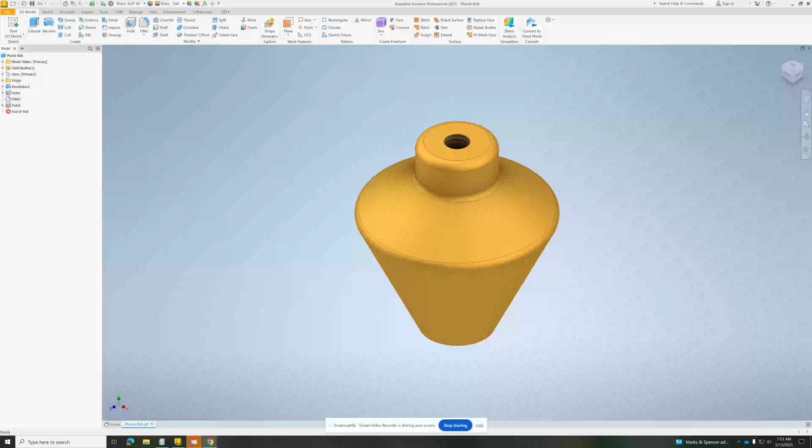Okay, in this video I'm going to go over how to do the Lathe CAM for this Plumb Bob. Some things to note: we have a tapped hole on each end, which means that we're going to need to flip the part in the lathe to tap the other side.

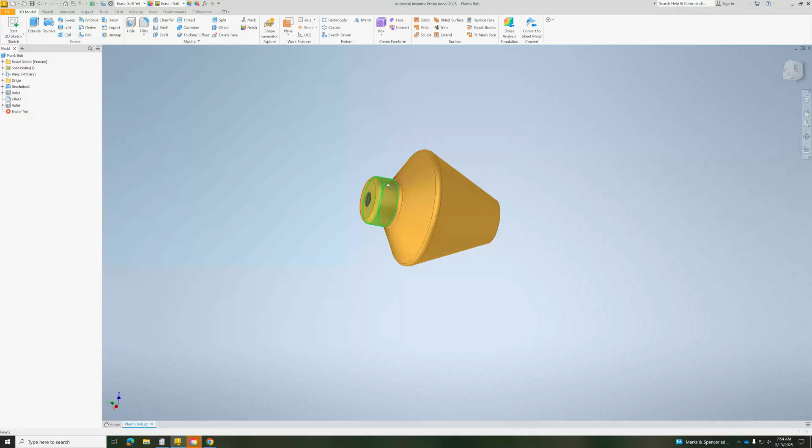Looking at this shape here, this is a cylindrical shape, so this could be held in the 3-jaw chuck on the second setup, and so it's recommended that we machine all of this first, do the cutoff, and then flip the part, hold this side, and then drill and tap on the opposite side.

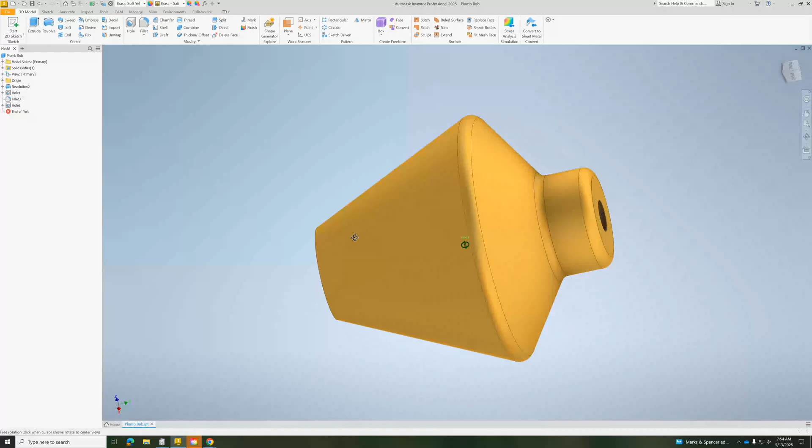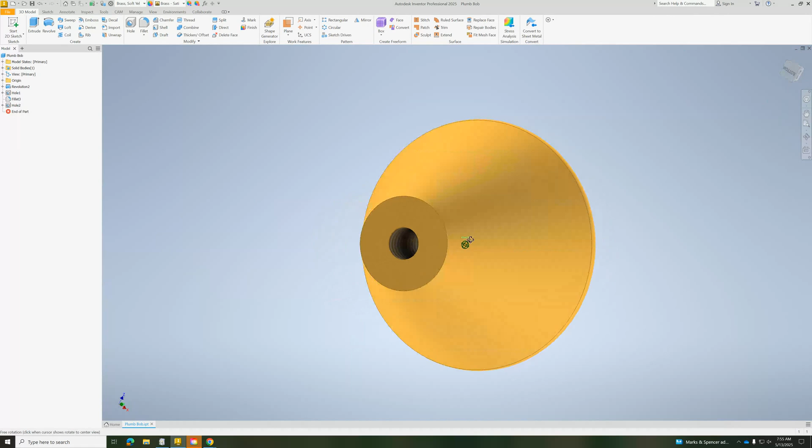One concern with flipping the part is ensuring that this hole is aligned or coaxial with this hole. And so one way to ensure that is when you do this drilling operation on the first setup, you could drill all the way through. One thing you need to make sure is that your drill bit is long enough to do that. I am going to demonstrate that

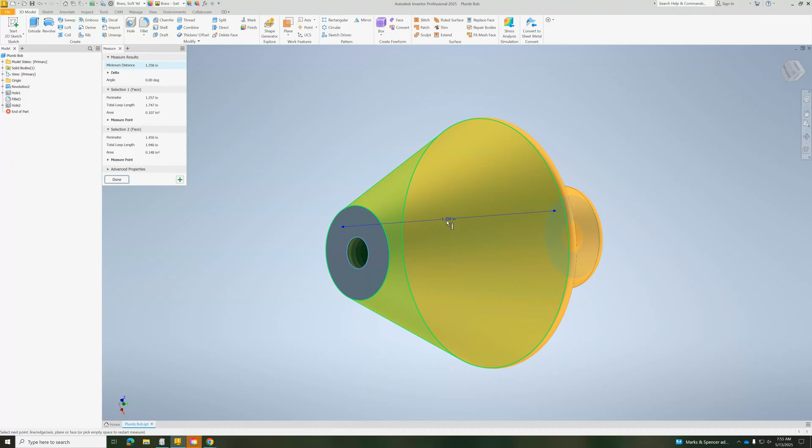when I do the setup, but then when going to the actual lathe, you would need to measure the length of the drill bit to make sure that it is sticking out longer than the length of the part plus the depth that you're cutting. So notice this is 1.358 inches. So if it's 1.6 inches or something like that, we should be fine. And if it's not, we would need to pull the drill bit out in the collet that it's held in so that it's long enough.

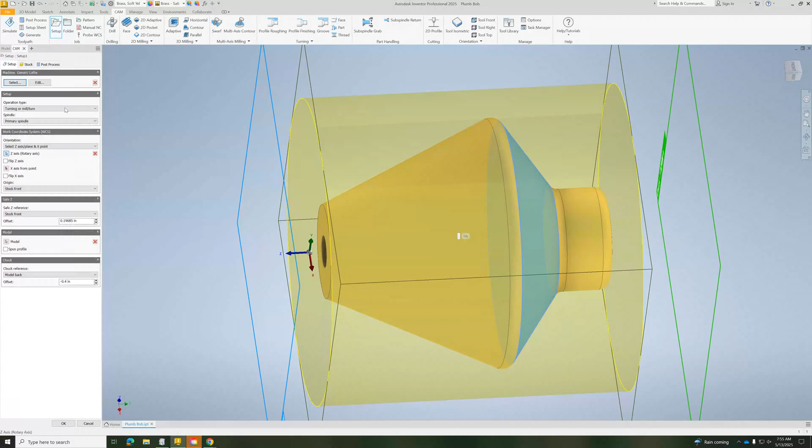So going through on the setup, we go to the cam tab, go to setup. First thing is we want to tell Inventor that we're using a lathe, and then what I'm going to do is flip the Z-axis and go to the stock. I am not sure of the stock size. Inventor chose 1.5 inch. That's a common size, so we'll just stick with that.

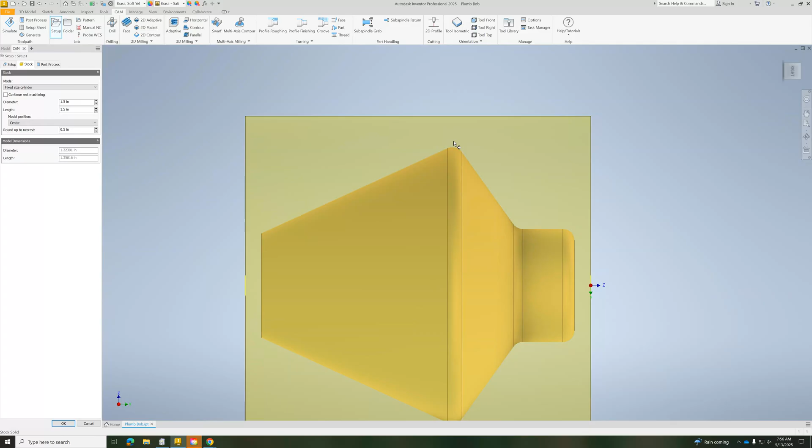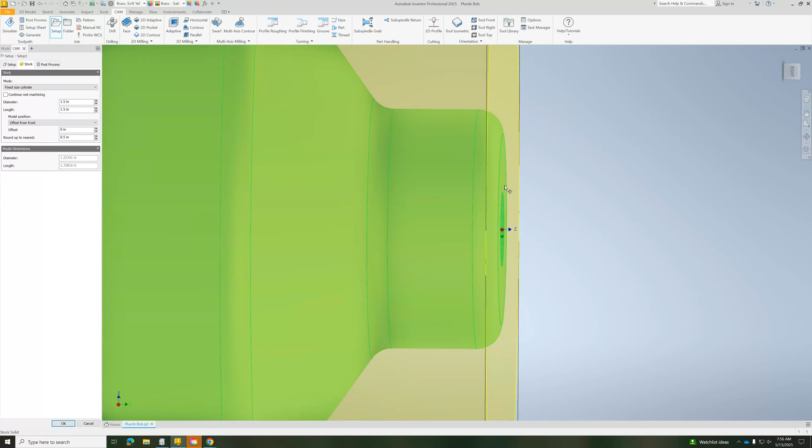We could probably find something a little bit smaller, but we don't always have the incremental size of stock that we would like. So there is a fair bit of waste because the stock is a little bit bigger than the diameter of the part. One thing I do want to do is go offset from the front so that the Z-axis or the XY plane is right at the surface of the part. Basically, we would face the part, set that as Z0, and then start the machining.

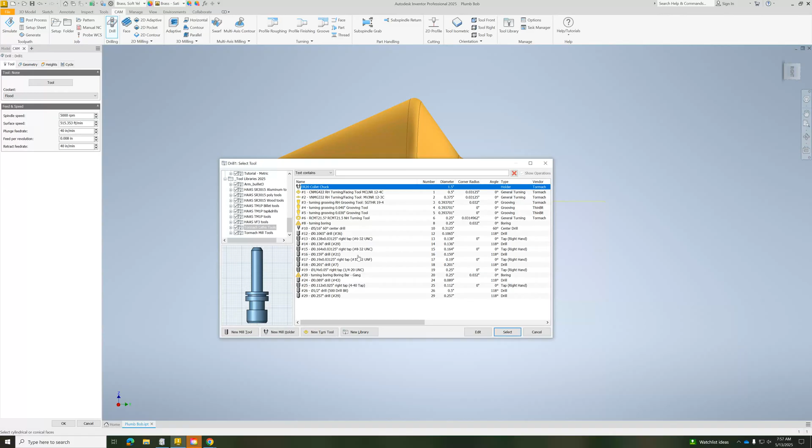So now that we have the setup done, I'm going to go to drill, select what I want to drill, go to the tool. On the lathe tools, this is a 10-32 hole, so we need a drill that will eventually be tapped at 10-32, which is this drill bit, 0.159. I'm going to go select.

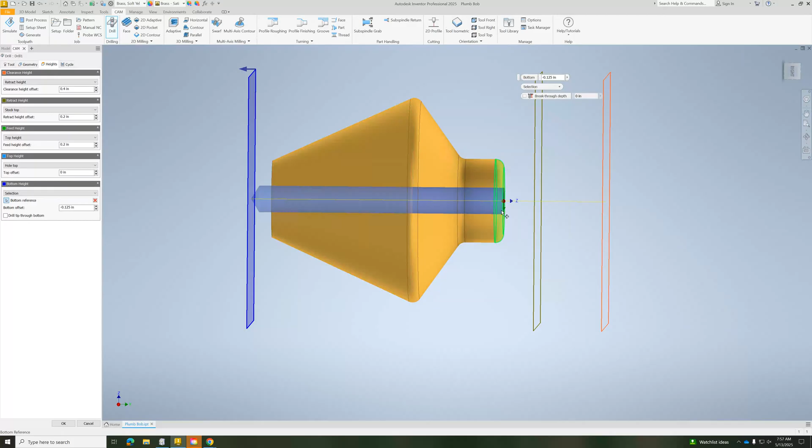Notice by default it sets the bottom depth at the bottom of the hole. What we're going to do is, instead of going to the hole bottom, I'm just going to go selection and select here, and then maybe we can go an additional 1/8 of an inch further to make sure that we've broken through. Notice that we need to make sure that the drill bit is that long to be able to get through that.

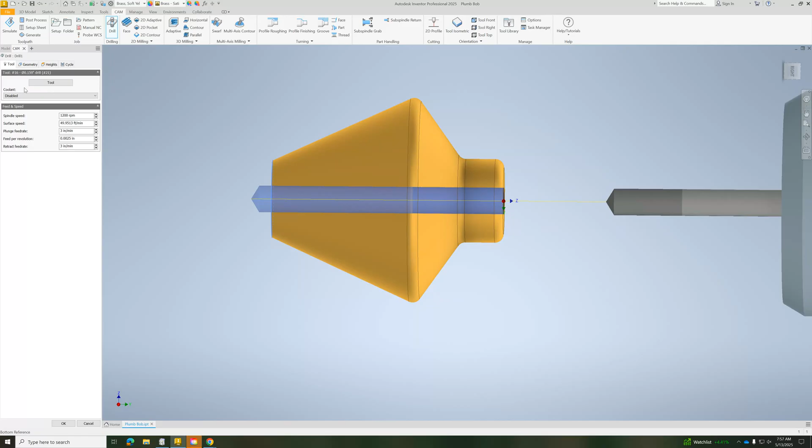Now, we want to not just do a standard drill. I recommend that we do a full retract deep drilling, and then it will go in almost 40 thousandths, and then clear the chips, go in again the additional 39 thousandths, and keep doing that until it's all the way through. We'll keep the default settings for the tool at 1200 RPM, and then hit OK.

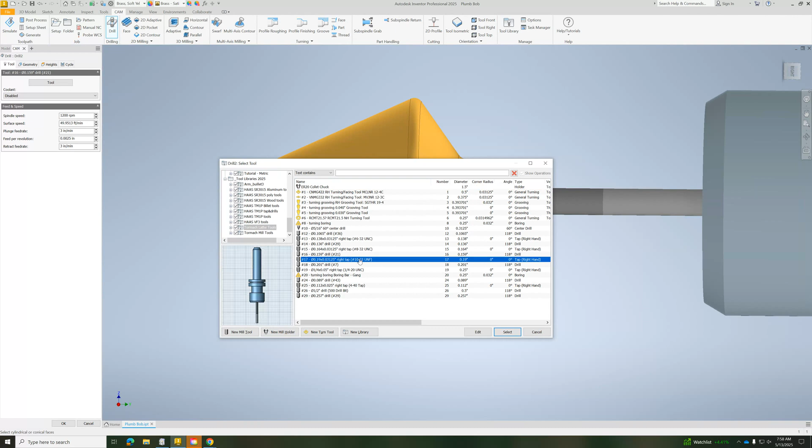Now that we have this drilled, we're going to go to drill again, but this time we're going to select the tap. So on the Tormach lathe tools, we'll select the tap, 10-32, which is here, the 10-32 tap. Select that.

The geometry is this. The height will just go to the bottom of the hole here. We're not tapping all the way through. And then the cycle, I recommend that we do tapping with chip breaking, and so it goes in, by the default is 47 thousandths, so it goes in 47 thousandths, comes out, goes in, comes out, until it's made it all the way through, or into the bottom of the hole.

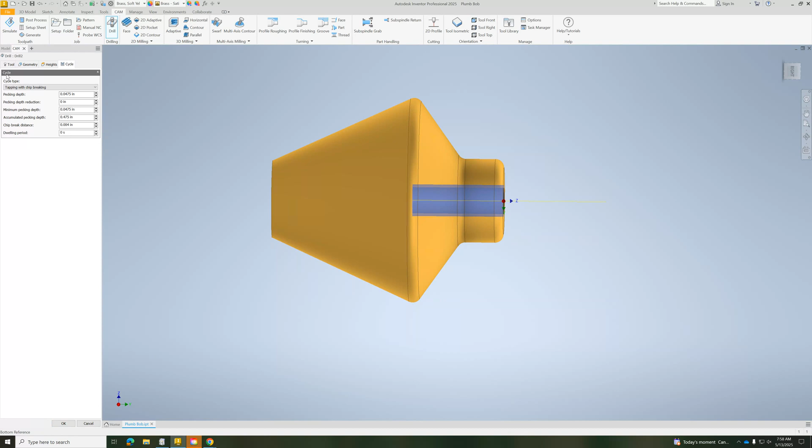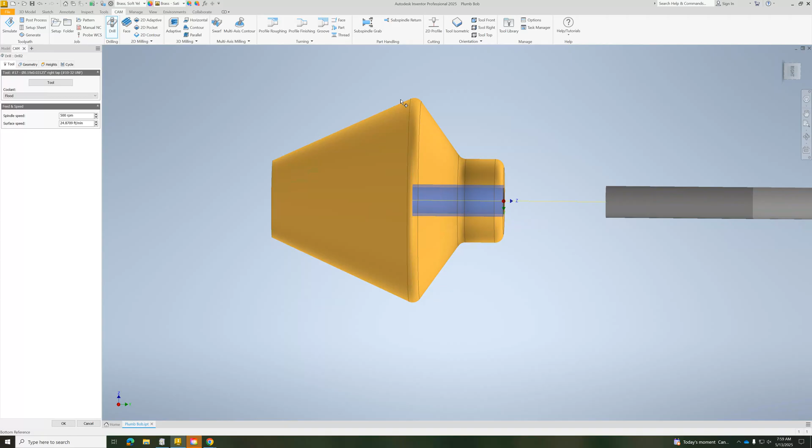When I set up the tools, I set up the speeds, and so the spindle speed is reasonable at 500 RPM. Realize that the machine has to reverse direction when the tap is coming out of the part. And so the Z speed, or the Z feed rate, must be clocked with the rotational speed to get that tap correct. So now that we're done with this, basically we're just doing the standard contour.

So I'm going to do profile roughing. Going to use, should be able to use tool 1 here, just the standard profiling tool. 1 or 2 would be fine. I'm going to select this tool. The speeds, definitely going to bring the speed down. And I am also going to change the depth of cut, maybe to 20 to 25 thousandths.

And I'm just going to go to the back of the part. Model back is, so it's going to go here. And there should be a little bit of stock to leave. And it looks like we're okay there. So I'm going to hit OK. See what that looks like.

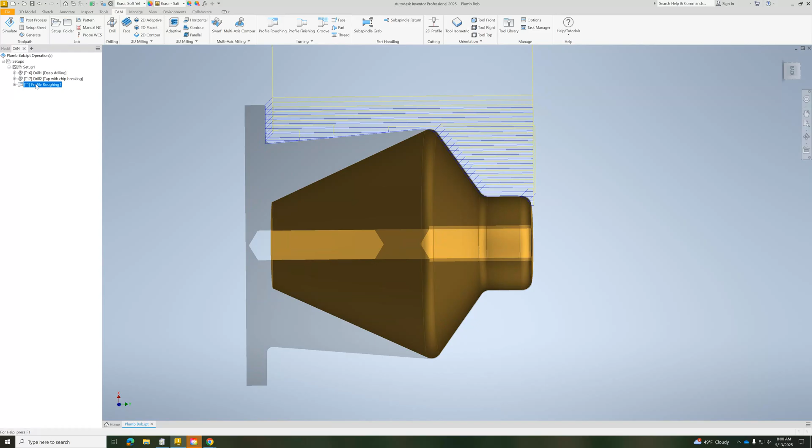Looks reasonable. Notice that we're not able to get this, and so what we need to do is see if we can do that with the other tool. So on the other tool, we're going to change this to tool 2 and select, go OK. And now with tool 2, since it's a sharper tool, we can actually get all of that shape on the back.

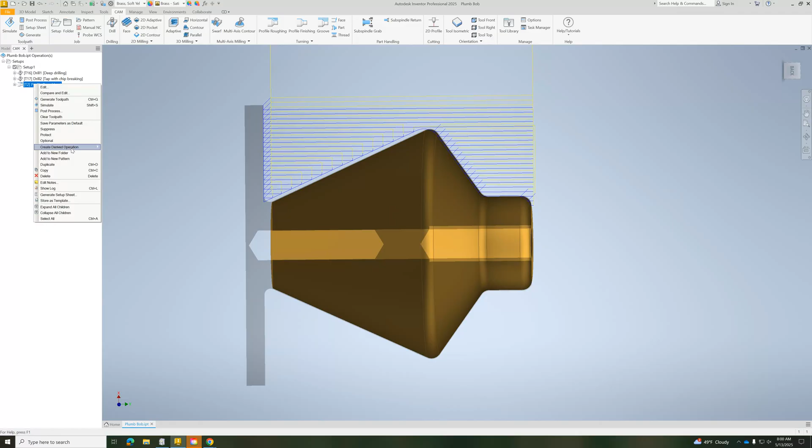Now that we have this, we should be able to do a finish pass. So I'm going to right click, create derived operation, turning, profile finishing. Here I would basically change the cutting feed rate to 5 thousandths or smaller to get a nice finished surface. And it's always nice to do a spring pass. Now we have that complete.

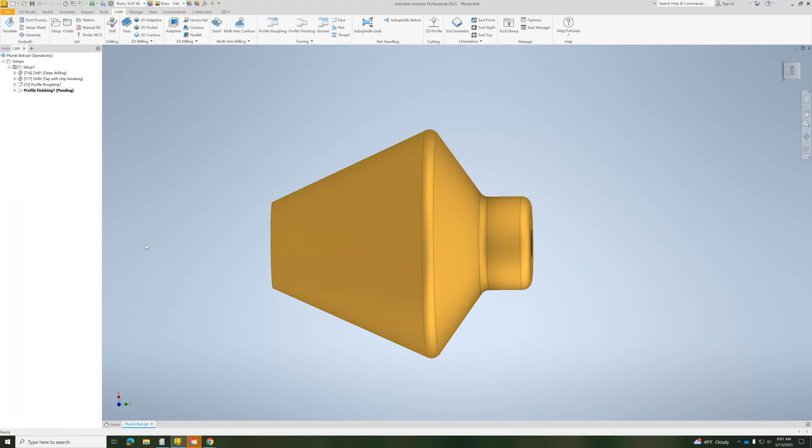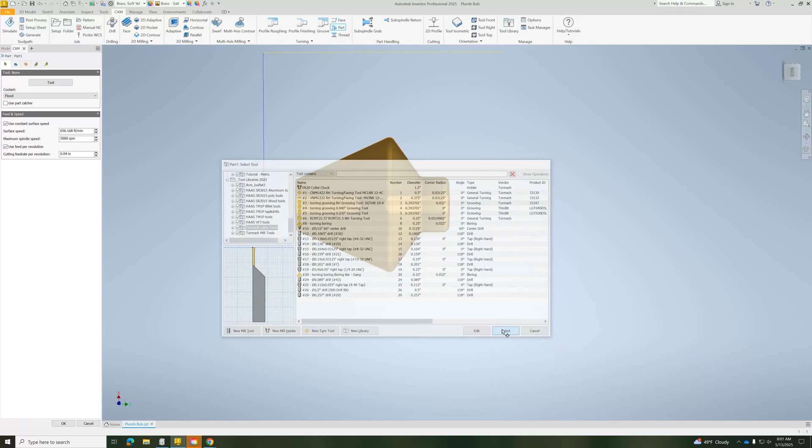Then the last thing we're going to do is just do an end cutoff. And so we're basically going to part with the parting tool. So selecting the lathe tools on the parting. I think it's this tool here, select. It already knows we're going to the back of the part. I'm just going to change this to 2000 RPM on the maximum spindle speed, hitting OK, and we part that off. Then all we would need to do for the second setup is the tapping.

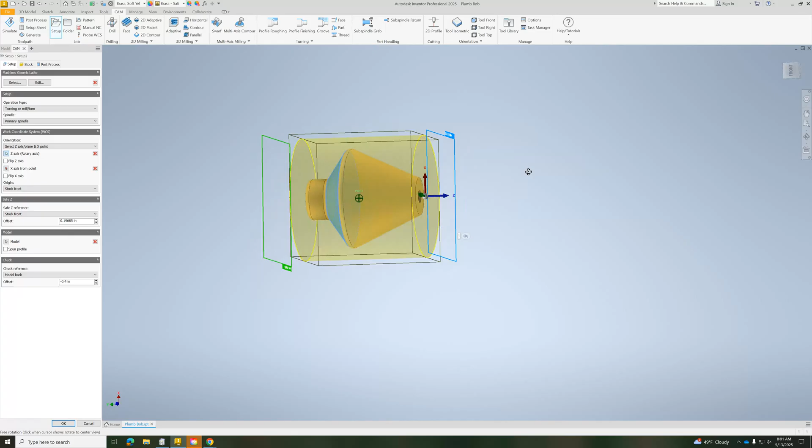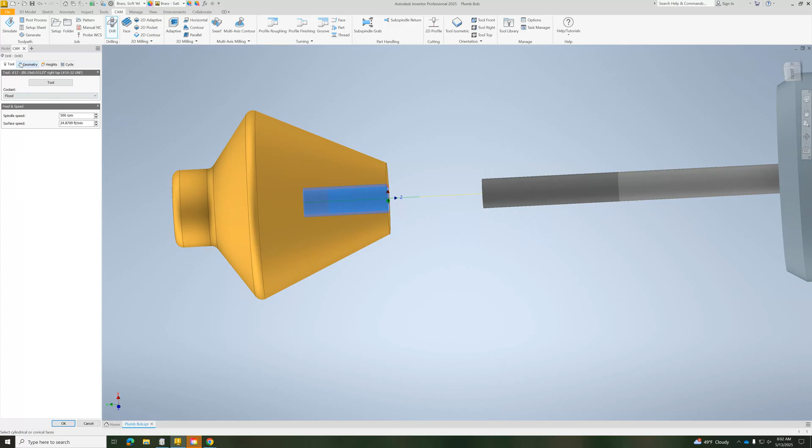And so I am going to create a new setup. Now we're going to have the part like this, and so all we need to do is go to the stock, go to offset from the front, go OK, and then all we need to do is the tapping. And so I'm just going to hit the drill, tap here. The tool is the tap. It looks like that's what it already has. The geometry, the depth is the hole bottom, and then the cycle we're going to just do tapping with chip breaking. Hit OK, and we tap that other side.

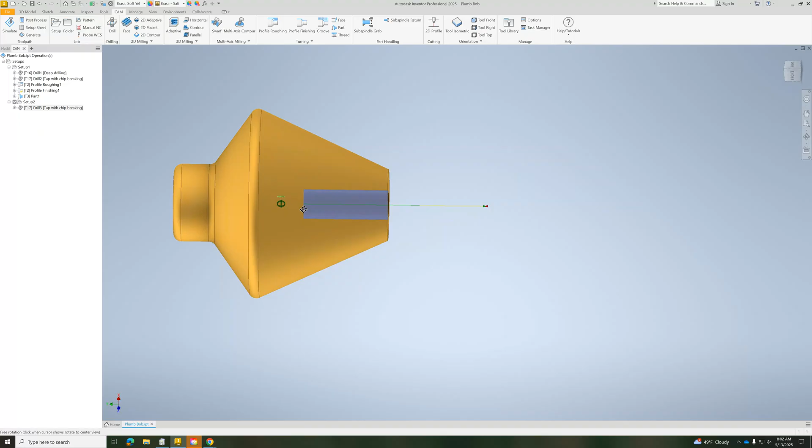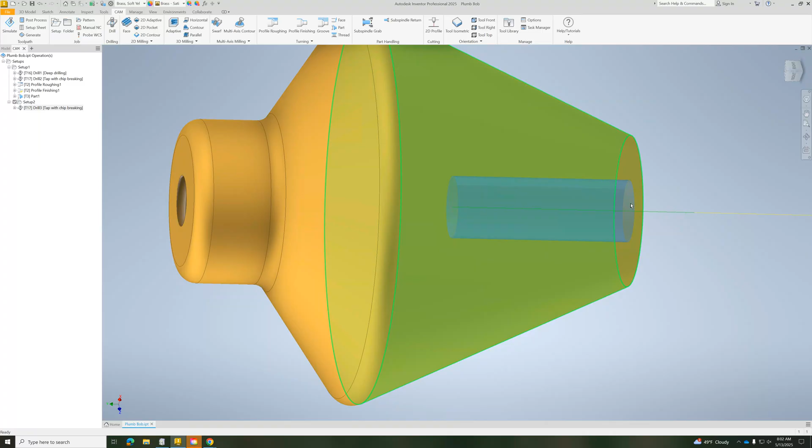The reason why we didn't need to drill is because we drilled all the way through on the first side. And I would recommend doing that if I were making that part, just to ensure that these two holes are coaxial, just making them one. One issue when flipping the part and grabbing this side in the 3-jaw chuck is this side you're not necessarily going to have zero runout. It's going to be wobbling a little bit, and so the hole here would not be coaxial with this hole here unless you drilled all the way through in the first setup. And that's it.